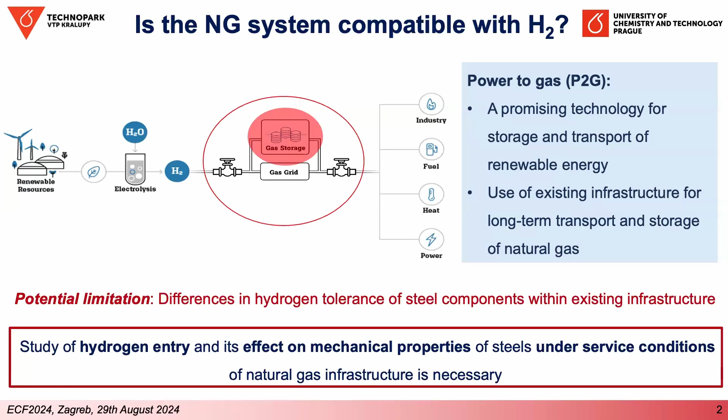I think I don't have to talk much about the motivation for hydrogen injection into the natural gas system and the necessity of experimental research here, but I want to express that we are focusing mostly on underground gas storages, which are the most complex part of the natural gas system. All three hydrogen embrittlement factors here are really variable. We can meet a lot of steel grades in different states, because in the Czech Republic we have 9 underground gas storages, mostly depleted fields, and they have been in service up to 60 years.

So you can imagine they will be in different states, with different surface states also, and they are mechanically loaded with different regimes from pressure fluctuation, but also from vibration from compressors and so on. The environment is also most variable here compared to, for example, the transport part of the system. You can have dry gas, but mostly with some humidity, and there are a lot of contaminants in this part of the system. Compared to the transport part, there are also higher pressures and temperatures, which change during the service life. And of course, in the future, there will be gaseous hydrogen, and that's why we are doing the research here.

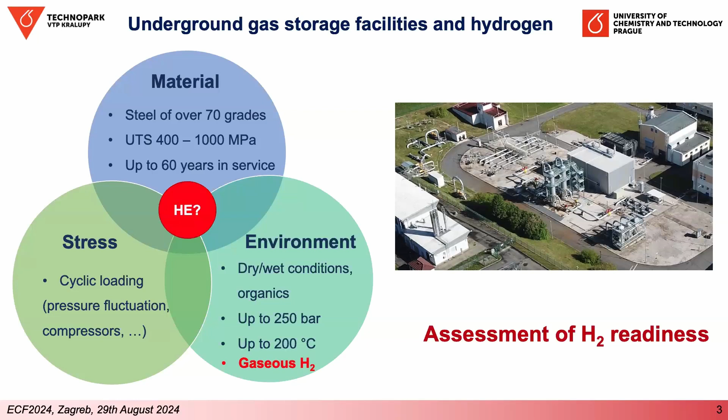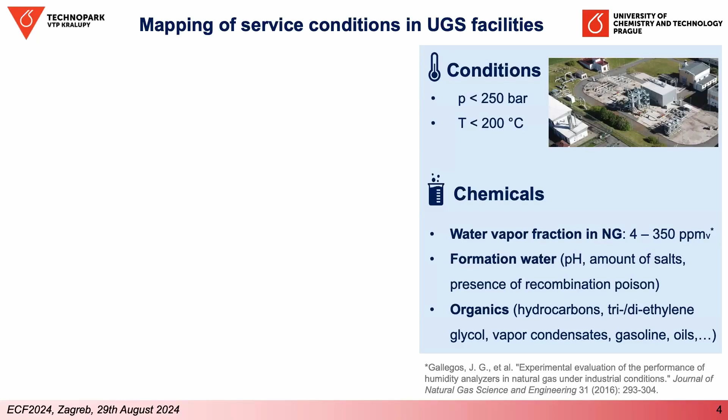Briefly about the contaminants, there is a lot of humidity in the natural gas because these facilities are not just for the storage of hydrogen or today's natural gas, but also for its cleaning before it's transferred to the customer. So there is a lot of formation water, which is underground water driven with natural gas from the reservoir during the withdrawal season, and also some organics like hydrocarbons, because these depleted fields were originally also for oil, not just gas, and some media for processing the natural gas, usually glycols for drying and so on.

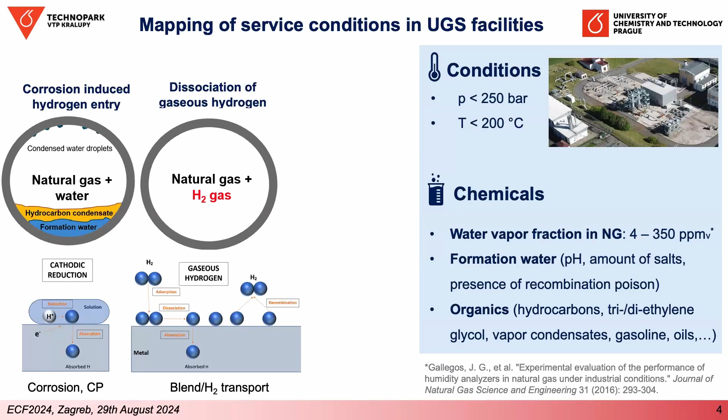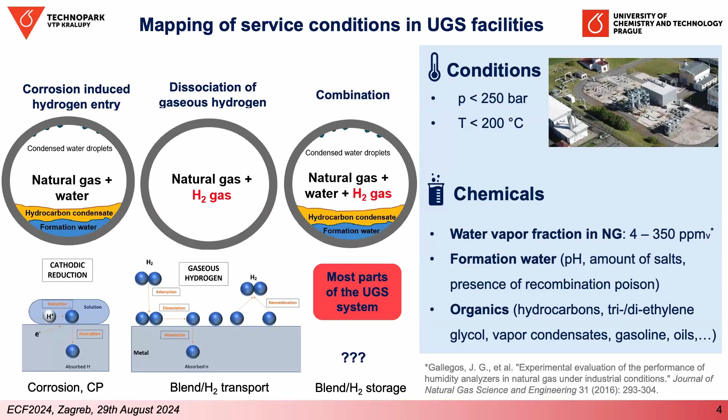Hydrogen entry in today's scenario is strictly corrosion-induced hydrogen, where the mechanism is cathodic reduction from corrosion itself or cathodic protection of the pipelines. In the future, for the transport part of the system with just dry natural gas, it will be blend or pure hydrogen. We know that this multi-step mechanism is quite different. There was a really nice talk from Professor Cheng in detail about this mechanism, that it has to happen on specific sites, but it can happen under service conditions. For underground gas storages, it will be a combination of these two sources, and very little is known about it. So that's where our focus is.

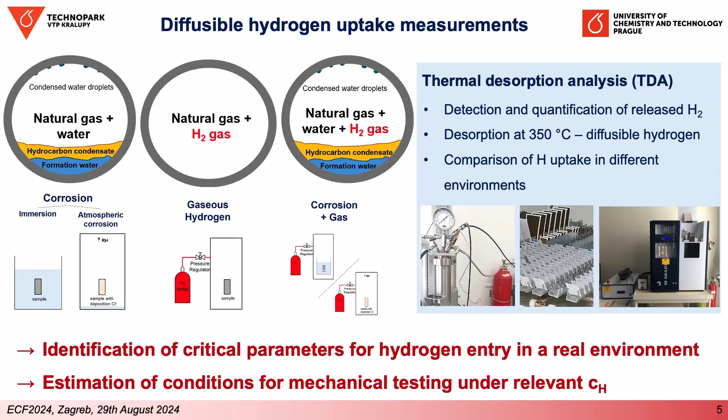We are modeling these situations with corrosion exposures and with an autoclave. Then we quantify hydrogen with TDA and try to identify critical parameters for hydrogen entry. And of course, we try to connect it with mechanical testing, but we also have, like many researchers, electrochemical in situ testing. So we are trying our best to reach relevant concentrations and trustworthy data for this practical tool. First of all, there was the mapping step to really understand what is happening there, what are the sources of hydrogen in the underground gas storages.

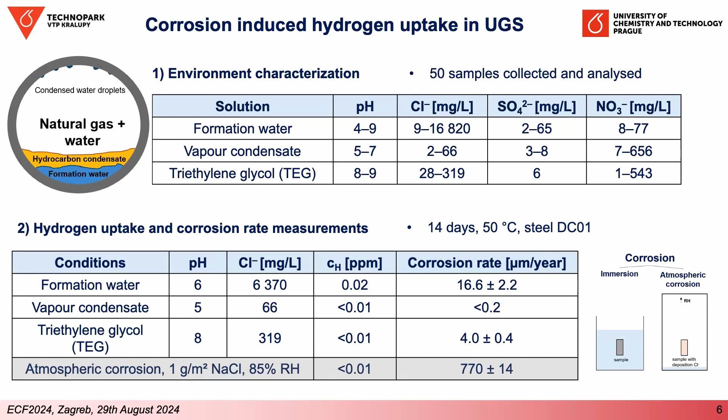We received a lot of samples of contaminants of 3 different types: formation water, vapor condensate, mostly hydrocarbons, and the glycols for drying. We did some characterization, but the most important here was the characterization of hydrogen uptake. Only the formation water was recognized as a source of a measurable amount of hydrogen in the steel, and it was connected with the corrosion rate. We did a mass loss test to evaluate the corrosion rate.

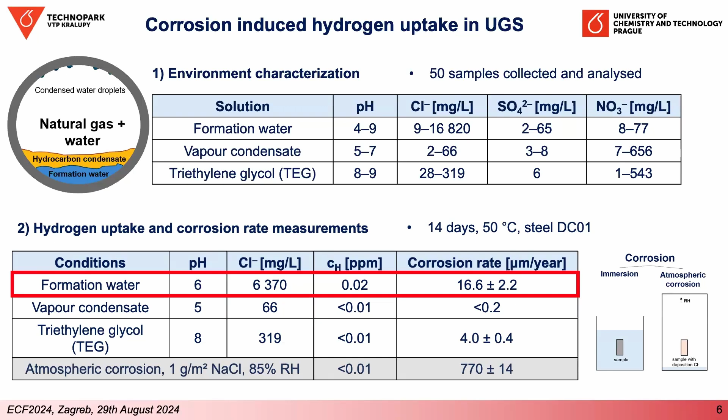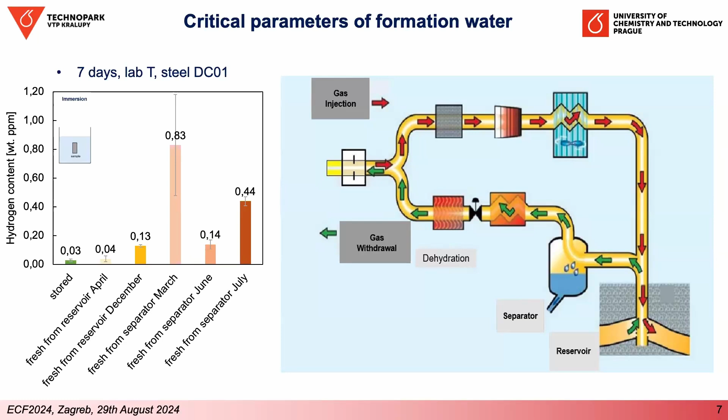So we approached a sampling step of these formation waters directly from the different parts of the reservoirs where formation water is typically present. It was quite surprising for us that it can differ really significantly, because at the beginning we worked just with stored samples. There was some hydrogen uptake, but not so dramatic. But when we did testing with fresh samples, there were quite high differences between these samples. And we did a lot of characterization of these samples.

I don't want to overwhelm you with the results, but the only thing you should notice here is that all the compounds or the values are quite low. These are results just for the recognized hydrogen recombination poisons, which can be the cause of higher hydrogen entry. It's still ongoing research, but for now we are not able to pick only one recombination poison which is responsible for it.

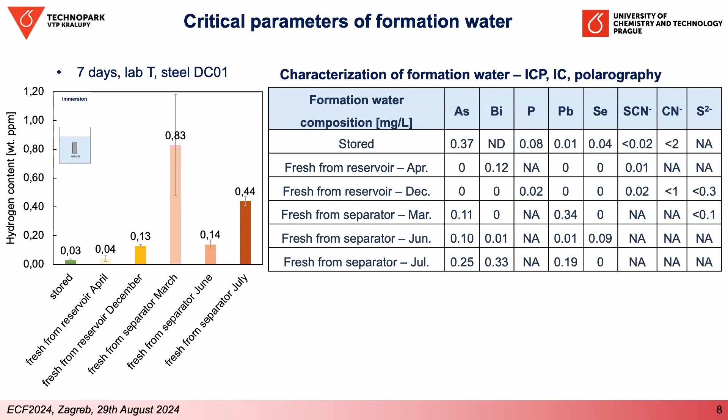So it is still some work in progress, but we know that this presence of formation water can be a problem, its nature can be a problem. It can also be connected with some microbial life. We had this suspicion from the beginning, because if you would be able to see and smell this sample, it really comes to your mind that there can be some life. Even some results showed, for example, a higher amount of ammonium and iron.

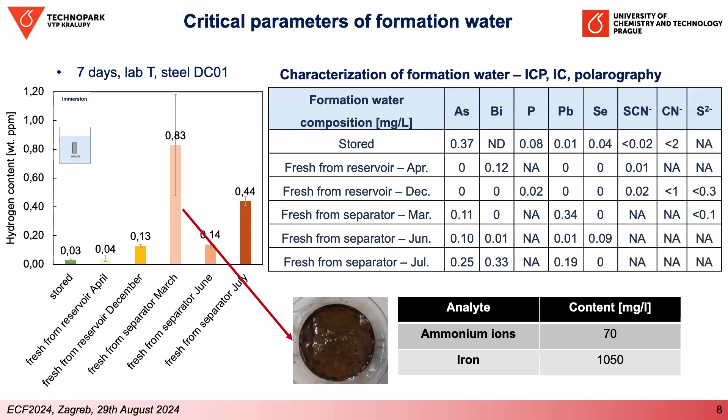We had a suspicion that there could be microbiologically induced corrosion, because this is a quite well-known issue in the gas industry. So we did some simple tests with treatment of the formation water by boiling or addition of biocide, that follows the mitigation process in the gas industry. And we see that there is really a significant difference in the results.

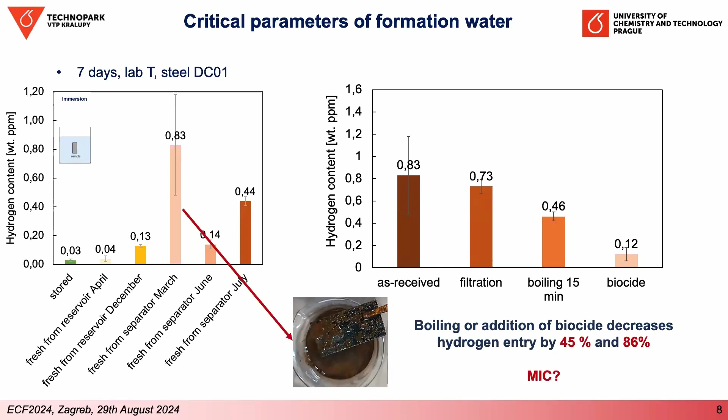So that is the evidence for now that MIC can be another critical parameter when you are evaluating the hydrogen entry in such conditions. But with MIC, you need multiple lines of evidence, and you are not able to say that it is MIC 100%, so that's kind of tricky, but we know about it, and we are still working on some methodology for sampling, characterizing, and then implementing it into our results.

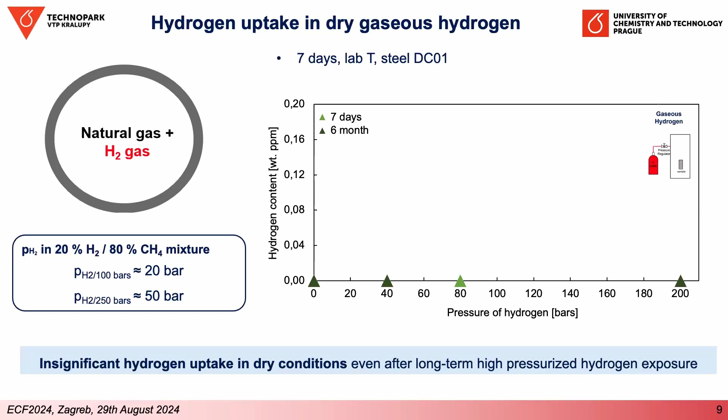So now let's move to some purer source of hydrogen. We use in our labs just pure hydrogen, but we are following the mostly discussed mixture with natural gas, 20% of hydrogen. So the total pressure of our pure hydrogen is correlated with the partial pressure in this discussed mixture. And as you can see, we are not able to measure the hydrogen entry even after 6 months exposure, at a somewhat higher hydrogen pressure to be really on the conservative side. I have to express here that these are just bare sheets, and really this mechanism isn't happening here much.

But if we are combining the gaseous hydrogen with other sources, with a corrosive environment, we can see that there is a significant increase in hydrogen entry, and it's mostly pronounced when the steel is in direct contact with the water and in the highly pressurized hydrogen. We used here just a plain model of formation water with the same level of chlorides as is usual in formation water, and saw this result. So we were curious what are the factors driving this promoting effect.

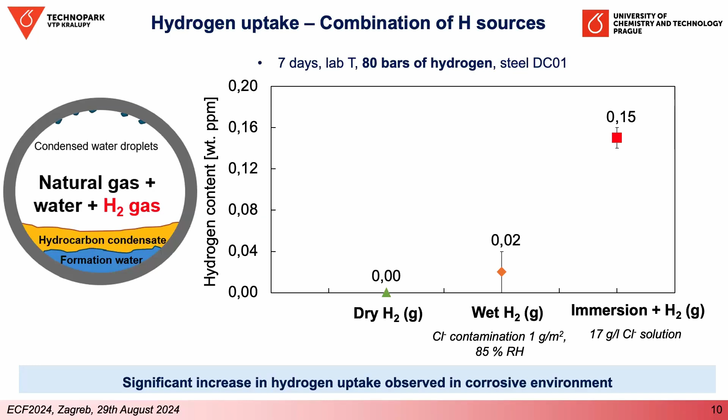So we did some more testing with the focus on temperature. We saw that there is a negligible effect of temperature on this promoting effect, but it's clearly driven by the pressure of hydrogen. But still, we are working on it with the effort to understand the mechanism behind it. It works also with demineralized water. We did some more sampling, and we have some results for the formation water, and of course, because the absolute amount of hydrogen entered from the formation water is higher, the synergy or the promoting effect can reach really high absolute values of hydrogen in the steel.

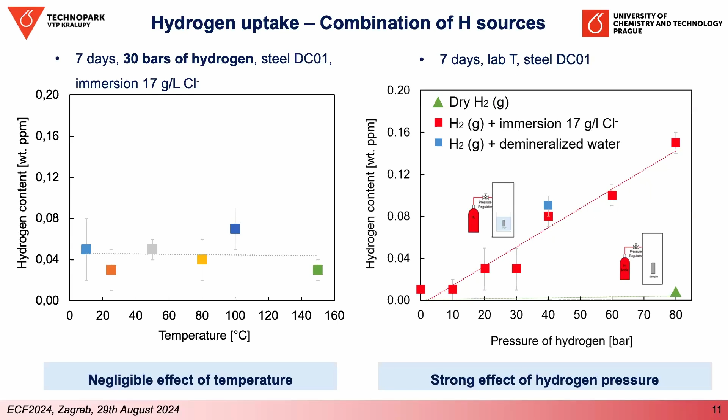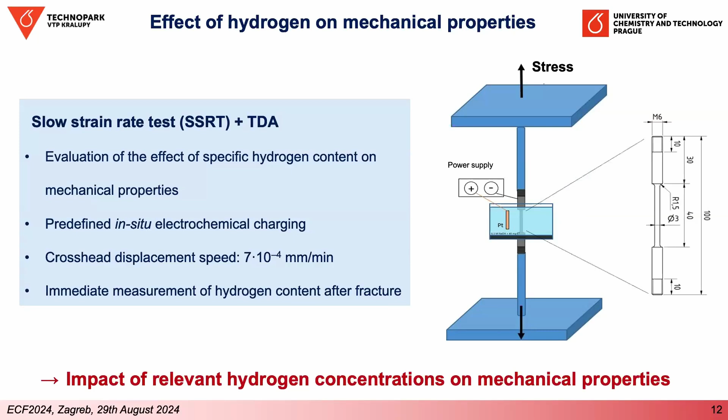So what are the critical parameters? Presence of formation water, its nature, and also the possibility of MIC should be taken into account. And then we are running some mechanical testing where we are trying to play with its parameters to receive more relevant data, because we started with the basic solution with the addition of the recombination poison, and we saw a drastic effect of the hydrogen mainly on elongation, but we know that this is not a realistic scenario. So now we are using this milder approach, and still we are able to see some effect. But we know that it's a really big simplification compared to gaseous charging.

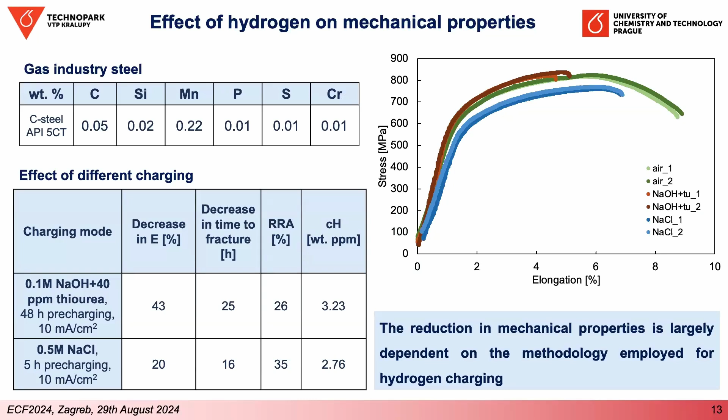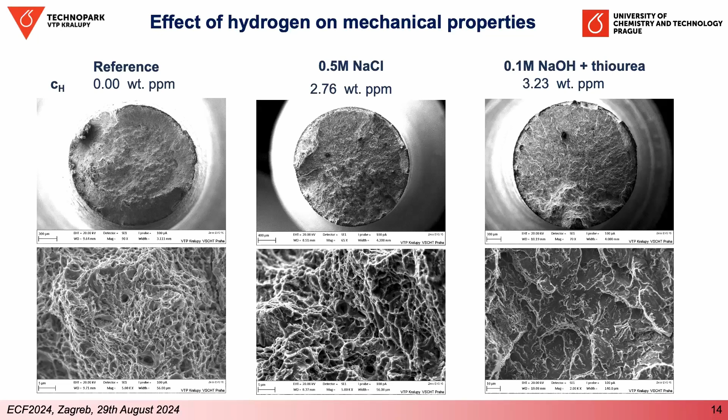So let's hope that in the future we will be able to connect it and compare it with gaseous hydrogen charging. And we are also trying to quantify the hydrogen. We are measuring TDA after the fracture, and we are able to see that the more severe the conditions of charging are, the higher the area of brittle fracture.

So yeah, that's it, if I can conclude it quickly. Critical parameters are presence of formation water, its nature, maybe the possibility of microbiologically induced corrosion, and we all know that it is important to set the parameters of the hydrogen charging appropriately to really receive trusted results.